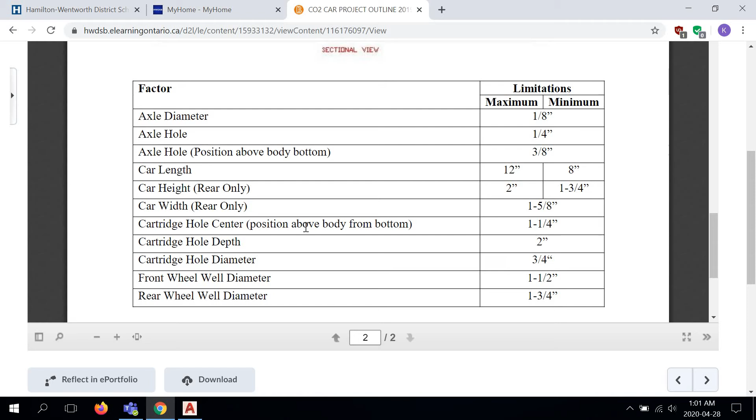Now, we're going to refer to the hub again. We're going to go back into CO2 Car Project Outline and scroll down, and we're going to look at car length again. So we've established in the previous video that the blank is drawn for you at 12 inches long, which is the maximum length that your CO2 car can be designed to. Now, the minimum is 8 inches, and we can be any number in between.

And this is something that typically gets forgotten. Students will look at this and they see the 12 inches and they think, oh, I have to use the entire length. Well, you don't. And as I continue through this process, I'm going to shorten mine up today. If you want to leave yours at 12 inches, that's totally fine because that's an option you can do. But if you want to shorten it up, that's fine and encouraged. So the minimum is 8 inches, but I'm going to use 9 inches. I've decided.

So to continue on, I'm going to hit offset. I'm going to type 9, enter. I'm going to offset from the back forward. I'm also going to do the same thing on the top view. So all of this geometry on the left side of this vertical line has to be either gripped and pulled back or trimmed or erased. So I'm going to start by erasing these lines because I don't need them anymore.

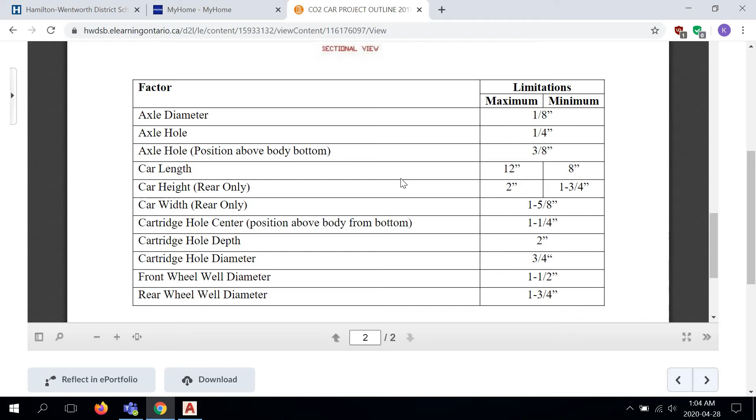Now, looking at this chart again, it doesn't give me a dimension for the position of the front axle hole. It does give me a height, which is 3/8. So the rear axle hole and the front axle hole have to be on the same height from the bottom of the car, but it doesn't tell you where the front one goes. So that means that is also something that you have to design as a part of this project. You're going to decide what position this front wheel is going to be located with that axle, right?

We know that the rear is locked in stone, and the reason that I have that in a certain position for you is to avoid a problem with the cartridge hole and making sure that you're not going to drill into the cartridge hole and create issues for that. So that's kind of already been pre-worked out by me for you. The front axle is pretty free game.

So I'm going to go back, and of course, these numbers I'm using today you're not going to find in the chart because that's part of design work. So I'm going to select 6 3/4 for my front axle position. So I have to type that in. Your numbers may be different, of course, and encouraged.

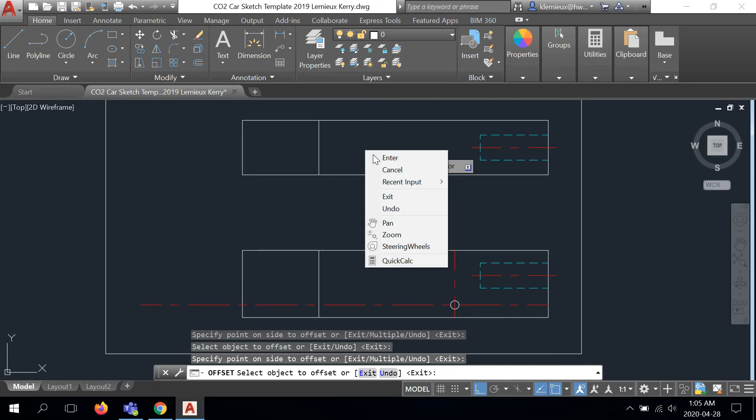So I'm going to use this line from the back, offset forward, and again, I'm going to do the same thing for the top view. Whatever I do to the side view, I must do to the top to maintain orthographic alignment. Okay, so this line and this line are going to represent a center line because this represents the center axis of that axle hole.

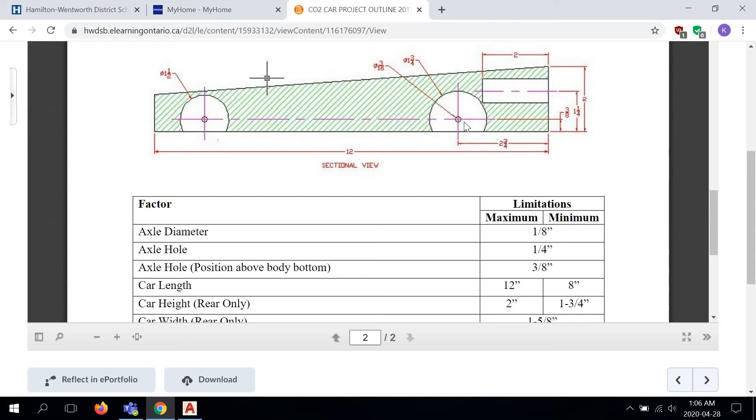We know that we are using an axle hole of a 1/4 inch diameter, the same thing we did for the rear. So that's what I'm going to start with. I'm going to grab the circle center diameter, go to this intersection, key in 1/4, 1/4 inch.

Okay, and another thing I can do, I didn't do this the other day, but I'll do this now. I should have done this already, is create another offset of 2 3/4 and bring this center line into this position to match the one we're seeing on the rear. So that is something I should have done already.

We're going to make this into a center line.

So next step is to show the hidden lines for the axle drilled holes. There's a couple of ways that you can do this. I'm going to show you 2 different ways.

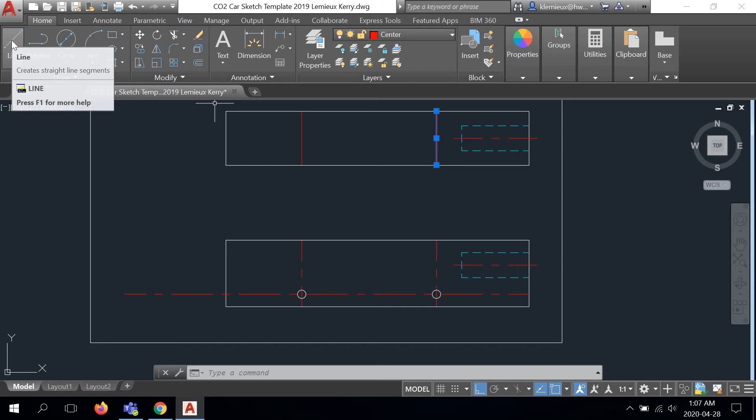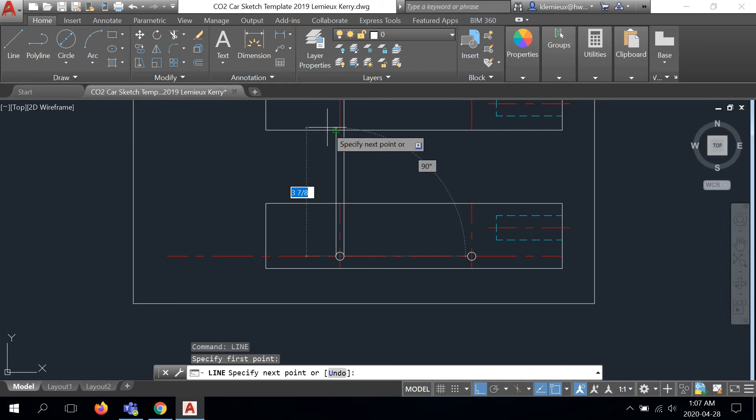You can grab the line command, zoom in, click onto the intersection of the axle hole, and click above and then snap that to the quadrant. You can also right click, repeat line, find the intersection, and come up to the perpendicular. If I said quadrant before, I apologize, these are perpendicular snaps. And then trim that away. This line and this line become hidden lines.

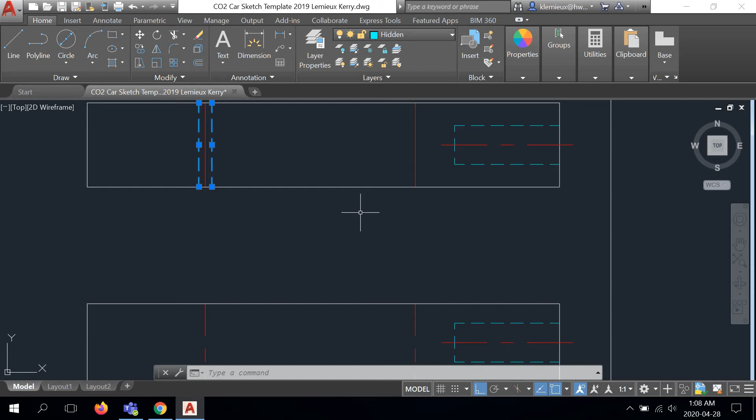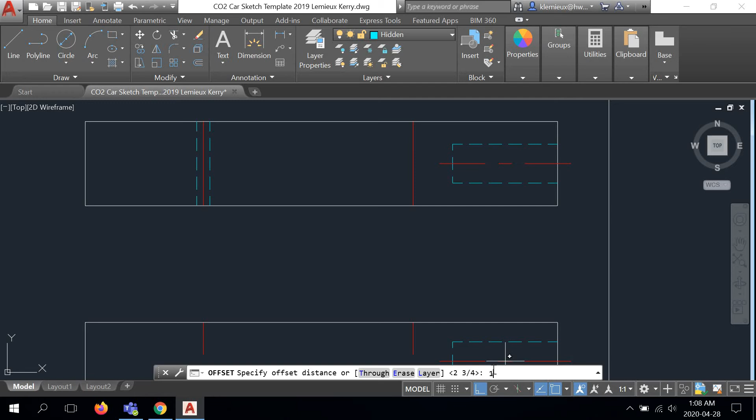Another way that you can do this is you can offset this center line 1/8 inch. So you remember, how do you find 1/2 a fraction? Well, your numerator stays the same and you multiply the denominator by 2, or you double it. So what we're going to do is that's going to give us 1/8. Click to the left, click to the right. So same result, just a different way to do things. Hidden line.

Okay, so far all of this is orthographically projecting properly. So we have axle holes at the front and the rear.

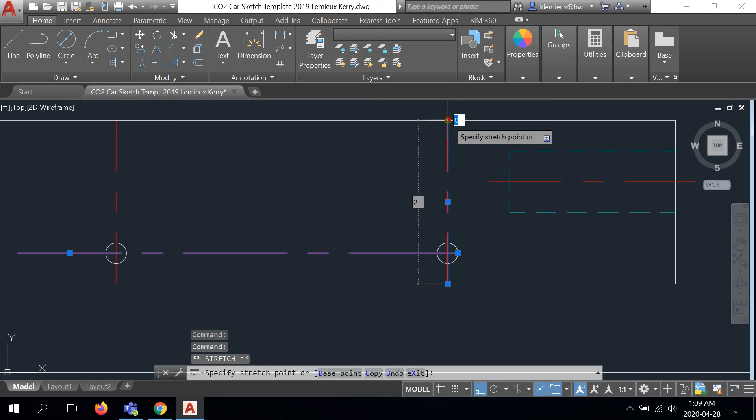Now these center lines, they are way too long, so we're going to adjust them. I'm going to select this center line and I'm going to pull them back to the quadrant or intersection of the drilled hole. I'm going to bring this one in. I'm also going to bring this one in. And this one is going to be gripped back to the front axle.

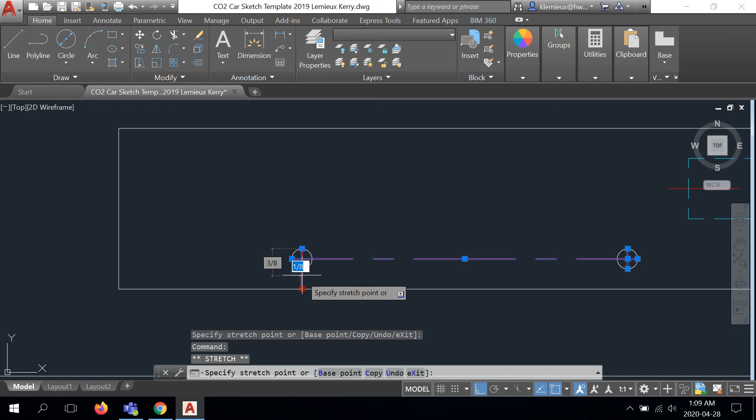Like so. And because we're working in an imperial drawing, center lines always extend beyond their feature. Again, something that we're familiar with. So we're using 1/4 inch. And this is something that I had established with you in the previous lesson concerning the extension of the center line for the cartridge. 1/4. And continuing on, I'm just going to finish this up.

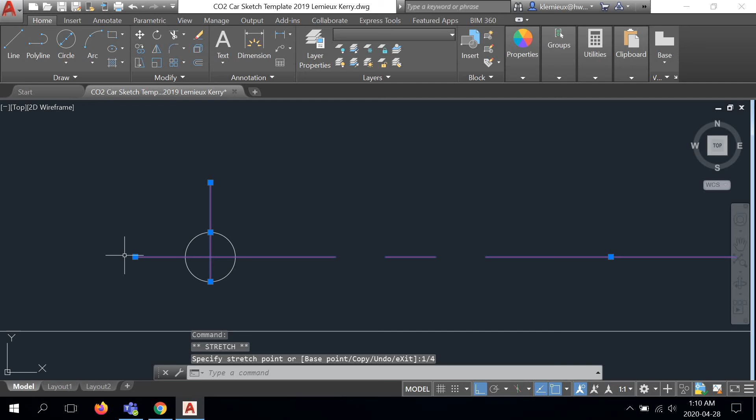Same thing goes for the top view.

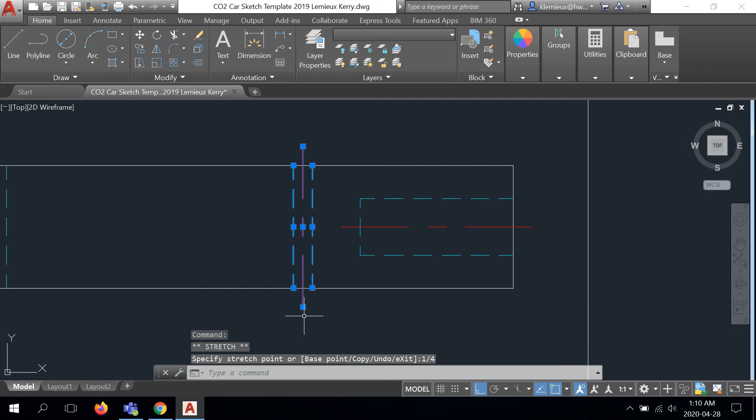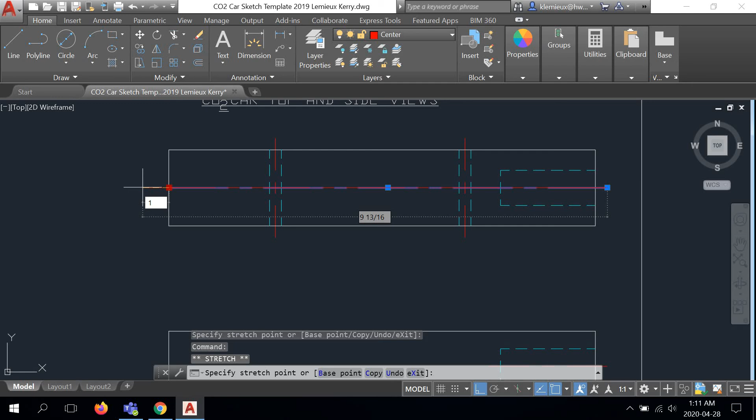Because there's symmetry on the top view, even though we haven't designed anything yet in terms of car shape, we know that whatever we do on one side of the blank is going to be mirrored to the other side. So we're going to take this center line and we're going to extend it to the end of the blank, and again from here extend it another 1/4 inch, like that.

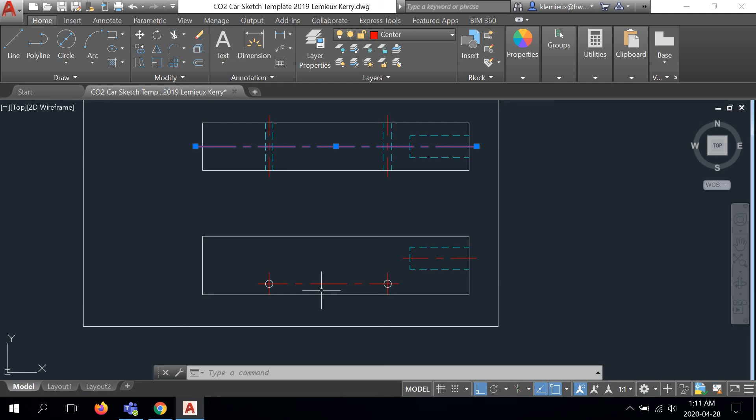Now, this particular design we're working on right now is a rail car, meaning that it has the wheels totally sitting on the outside of the piece of lumber or the car body itself. So, like you're seeing here. So this is an example of a rail car. I'm going to be showing you how to do a few different designs as well as some hybrids, so it's all going to be covered very nicely to help you along.

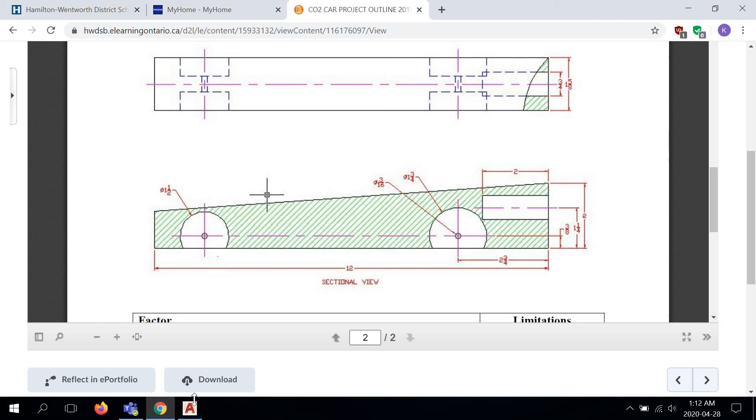But if we were doing a rail car, this is all we would do in terms of we would just have axle holes like this. The reason the center line passes through each axle hole is to represent that these axle holes are sitting at the exact same height. So the center line communicates that to the person in the shop who's going to construct the car. In that case, it's you, which is not always the case.

Usually we have designers and builders, but the language of drafting is universal. So if someone in the shop is going to build your car, your design, they would be able to look at this and say, oh, I understand the axle height for the axle hole is the same height for both drilled holes, right? So that's why you need to have your center line passing through. This doesn't represent symmetry. In this case, it represents alignment.

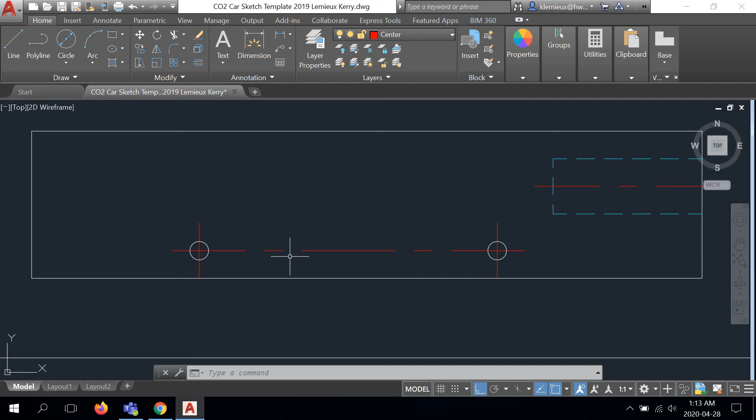But this is where I'm going to end today's lesson. So we are going to talk about shell cars and rail cars next time.